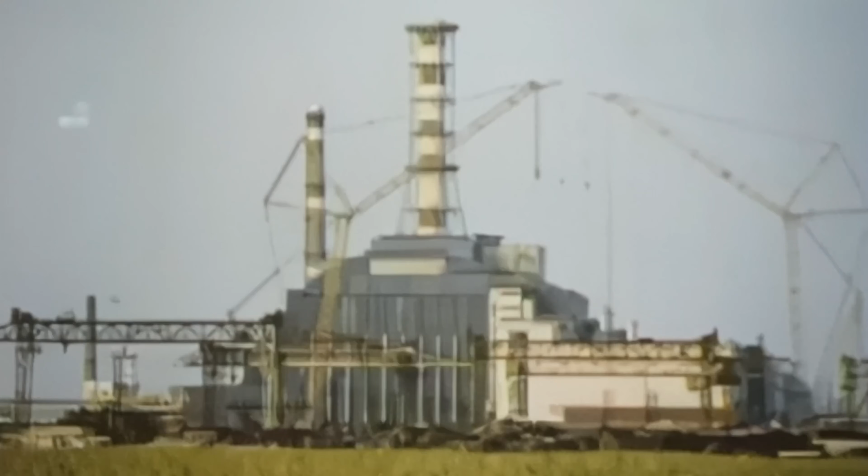Mercifully, we are approaching the end of the long 1990 article 'Investing Chernobyl,' written by Chernobyl liquidation veterans and nuclear power plant workers. Let us remind ourselves why we have spent so much time on this thing, boring and confusing many people who have experienced the misfortune of clicking on one of these videos. Despite being authored by people with direct experience of Chernobyl, the article was written in what is referred to as a peculiar historical period where the information reaching the public was, let us say, curated. And so this particular article was consigned to a local newspaper and limited publicity, the truth of it notwithstanding.

We have decided to give it more attention and publicity, as the points raised in it mirror the much better known International Atomic Energy Agency INSAG-7 report published roughly 2 years later, and in some instances provide supplemental information. This article also benefits from not needing to heed diplomatic considerations, and therefore states highly significant takeaways plainly, rather than trying to equivocate.

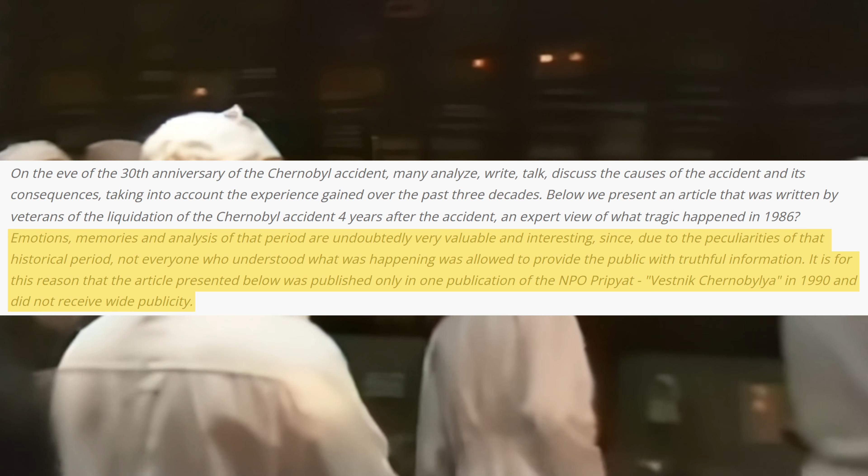We are now on the 5th violation that the article authors put in quotation marks to convey irony and sarcasm. The 6 violations the article focuses on are a direct reference to the table of alleged violations Soviet nuclear power experts submitted to the IAEA 4 years earlier to substantiate why the operators of Reactor 4 were responsible for the Chernobyl disaster.

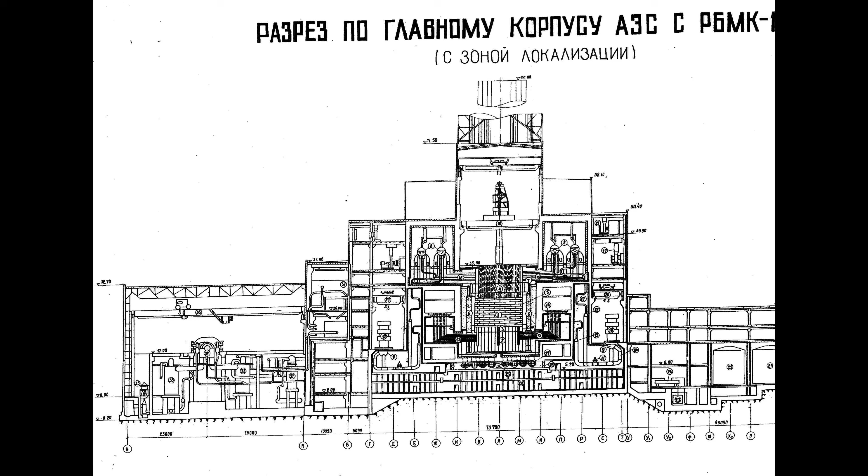The article authors refer to the official wording of 'blocking of protection systems relying on water level and steam pressure in the drum separator.' In the RBMK coolant loop, steam separator drums separated steam subsequently sent to electricity producing turbogenerators from water coming out of the reactor core that was mixed with subcooling feed water and recirculated through the reactor core. Both the water level and the steam pressure were monitored in these drums and had certain limits attached to them.

The article authors highlight the listed consequence of the actions of the operators as being that 'the reactor protection by thermal parameters was completely disabled.' Then the article authors proceed to call what they just quoted complete misinformation. Both parameters under consideration had upper and lower safety limits. In claiming that the reactor protection by thermal parameters was completely disabled, Soviet nuclear power experts implied that all safety limits had been disabled—or, in other words, with 2 parameters having 2 limits each, that 4 protections were disabled.

Without any recourse to information outside of what Soviet experts were claiming, even some workers of RBMK nuclear power plants concluded that the Chernobyl operators were guilty. Yet these safety parameters, unlike the operating reactivity margin or number of control rods in the core, were amply monitored and documented. There were at least 3 monitoring and recording devices for each parameter. There was warning and emergency signaling, both visual and auditory. There were automatic reactor shutdown systems, and finally, there were the operating instructions.

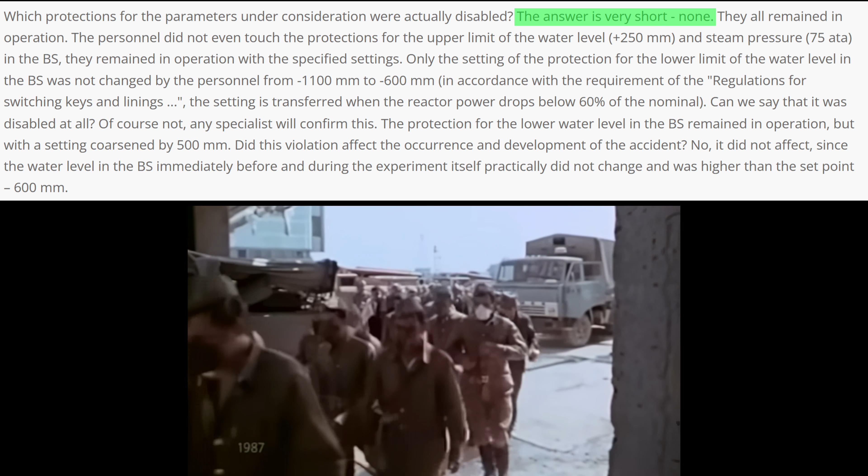So which protections for these parameters were actually disabled? According to the authors, none—they were all in operation. The upper limits for water level and steam pressure in the separator drums were untouched. There is one limit where a degree of complexity is involved, and that was the lower limit for the water level. The operators were supposed to change the set point from minus 1100 millimeters to minus 600 millimeters.

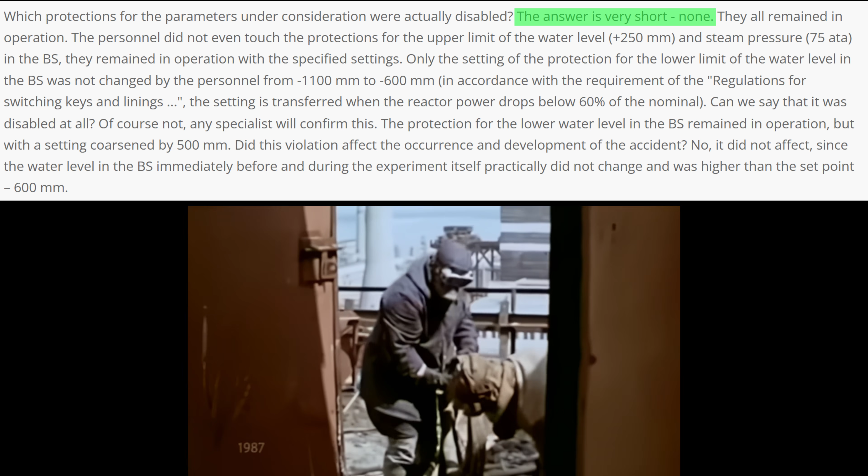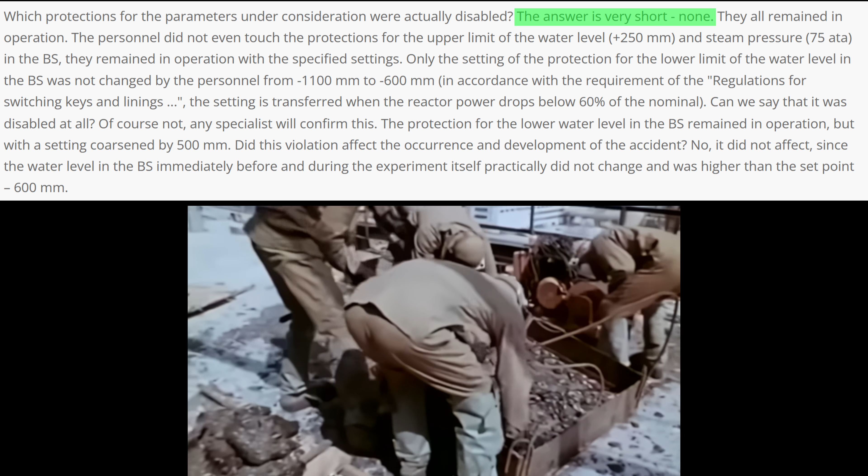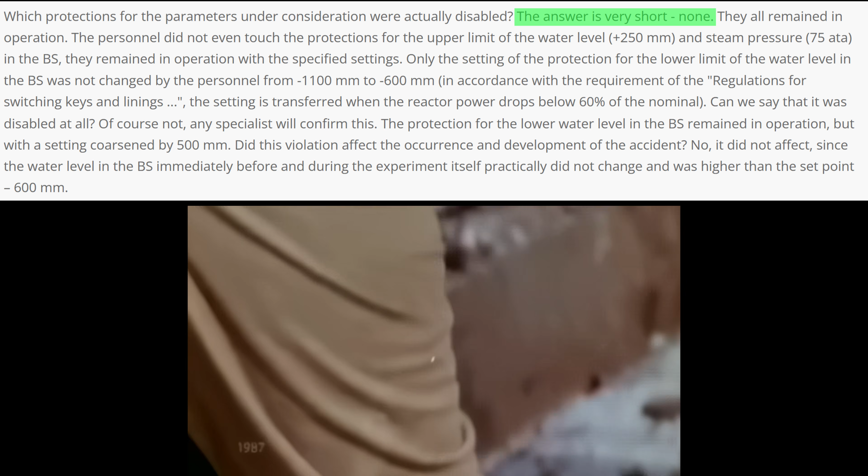Make sure to note that nothing was disabled—rather, it was not enabled. We will turn to this matter when we look at the corresponding text in INSAG-7, because there is a very meaningful distinction between disabling and not enabling here that most people fail to appreciate, if they have ever encountered or attempted to process it. A lower limit protection remained in operation at minus 1100 millimeters. But for now, let's say in quotation marks, the operators committed a violation in not transferring this lower limit to minus 600 millimeters.

Did this violation affect the disaster? The article authors state no, since the parameter immediately before and during the experiment was higher than minus 600 millimeters.

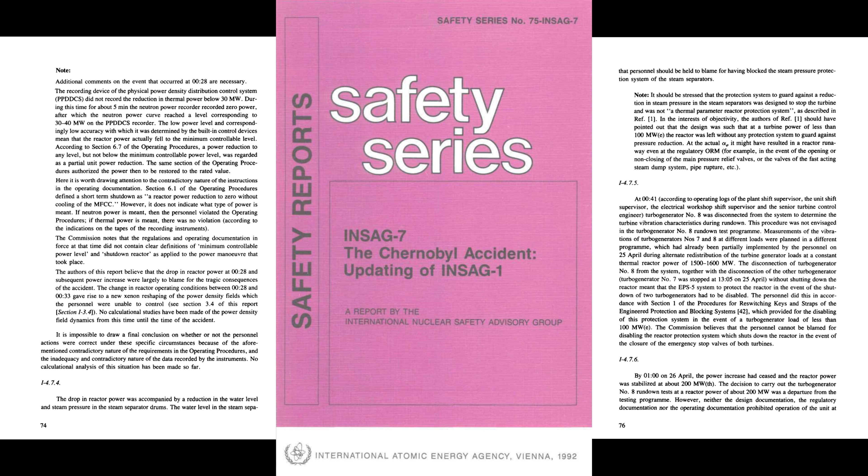Let's turn to section I-4.7.4 of INSAG-7 on pages 74 to 76 to affirm and expand on what we just read from the article. This section tells us that the drop in reactor power was accompanied by a reduction in the water level and steam pressure in the steam separator drums. The water level did fall below the minus 600 millimeter emergency set point without the reactor being shut down. Again, rather than disabling this set point based protection, what the operators did was not enable it.

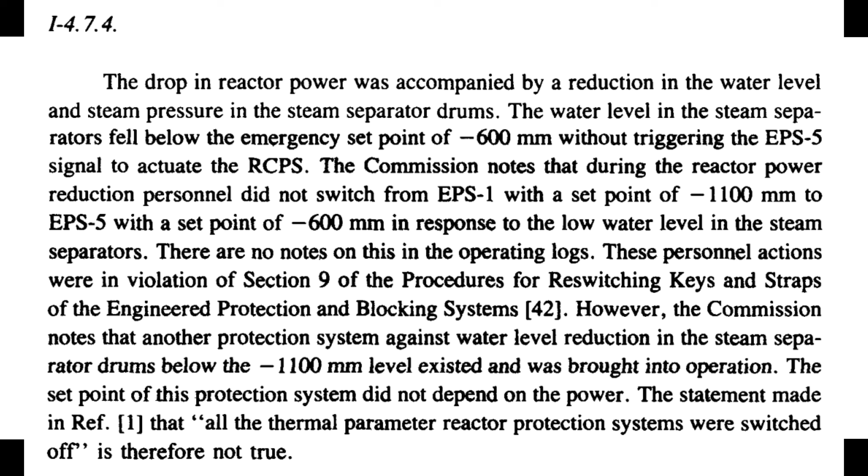This was a violation, which will be clarified shortly. However, protection against water level reduction in the steam separator drums below the minus 1100 millimeter level was in operation.

This voids the statement in INSAG 1 that all thermal parameter reactor protection systems were switched off. Then comes the real kicker. In a note, the designers of the RBMK are quoted. The source is NIKIET, the chief design engineer of the project, who, alongside the scientific manager, the Kurchatov Institute of Atomic Energy, were mostly responsible for the design of the RBMK units. The quote is as follows.

Automatic reswitching of the set points of EPS1 and EPS5 during emergency fluctuations of the water level in the steam separator drums is not permitted, since during operation of any of the emergency protection systems 1, 2, and 3, the water level falls to the minus 600 millimeter set point on the instrument, which has a range of plus 400 to minus 1200 millimeters. This, in turn, will result in actuation of EPS5 and complete shutdown of the reactor.

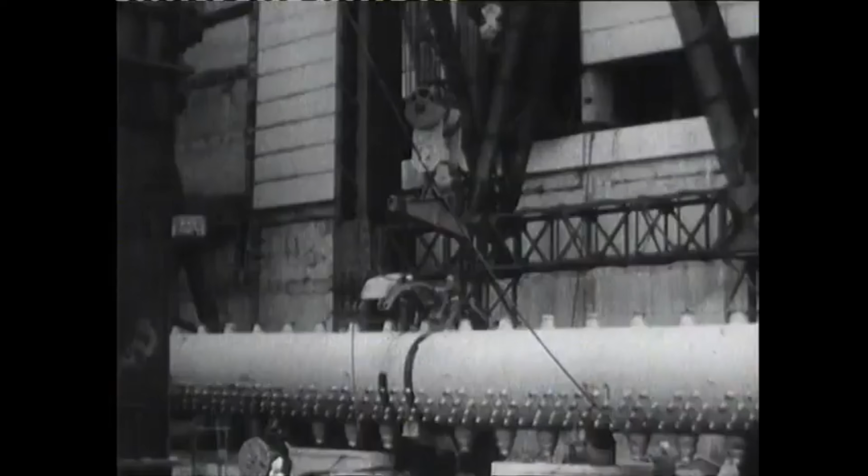This quote shows that the designers of the RBMK did not implement a complete automatic protection system against a low water level in the steam separator drums in the operational circumstances on the night of the Chernobyl disaster, because they explicitly did not want the reactor to be automatically shut down when the water level fell to minus 600 millimeters.

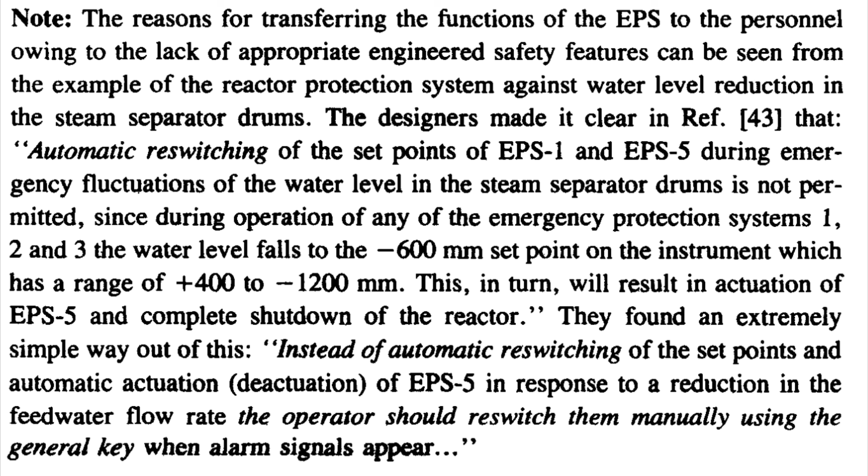The note comments on the extremely simple way out of this. Instead of automatic reswitching of the set points and an automatic shutdown of the reactor, it was left to the operators to manually switch the set points and thus shut down the reactor. This is in the context of the designers explicitly not wanting the reactor to be shut down. Do you see where this is going?

In the following paragraph, it is pointed out an automatic engineering solution was possible, but keeping the reactor running was prioritized. So how was this design decision reflected in operation?

Let's turn to section I-4.6.1 on page 63 and note the title of it: Period of normal operation and preparations for the tests. On page 64, we encounter the following paragraph.

During the period from the beginning of power rise to stabilization of the reactor parameters at 200 megawatts, at about 1:23, normal technical processes and operations were taking place at the unit, except for the switching on of the fourth MCP pair. These included triggering of the fast-acting systems for dumping steam to the condenser, manual control of the water level in the steam separator drums, overcompensation of the reactor, etc.

Among the normal technical processes listed is manual control of the water level in the steam separator drums, the particular emergency set point for which was under manual control rather than automatic protection, because the designers explicitly did not want the reactor to be shut down upon the particular emergency marker being hit. Manually controlling the reactor around this emergency set point was normal practice.

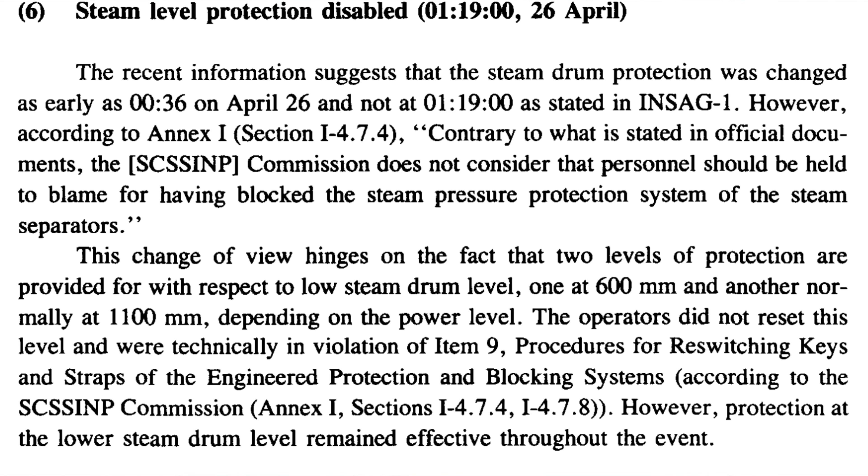There is another wrinkle to this. Page 12 of INSAG 7 identifies another instance of a timing being changed, much as the timing of the disabling of the two-turbine disconnection trip was changed, which we discussed in the preceding video. Soviet experts claimed that the protection systems based on steam pressure and water level in the steam separator drums were disabled at 1:19, in proximity to the runaway and explosions.

This was part of how Soviet experts dramatized their own narrative, constructing their own block of Swiss cheese that the operators ate through on their way to disaster. Call it Soviet Swiss cheese, for its marketing is dramatically different from its quality.

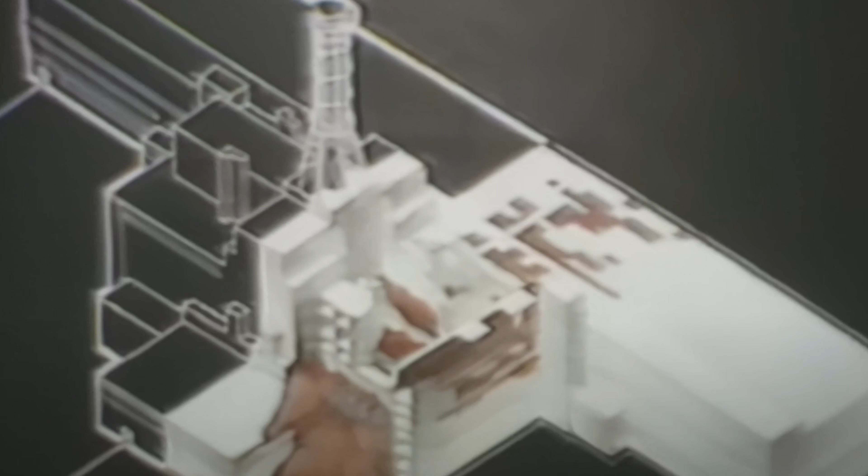As with the two-turbine disconnection trip, Soviet experts changed timings they were well aware of for reasons they were well aware of, to make it seem like operators were given multiple chances in close proximity to the disaster to take an off-ramp, no matter how many violations they had already committed.

Let's look at the timeline on page 54 of INSAG 7. You can see the set point change of the steam pressure being at 0036 rather than at 1:19, which is what the text we were just looking at was focusing on. But at the moment we're focusing on the water level.

On this timeline you can see 6 emergency water fluctuations. We know that the operators were manually controlling the water level rather than resorting to shutting the reactor down, because the designers did not want the reactor to be shut down. But there is even more to this.

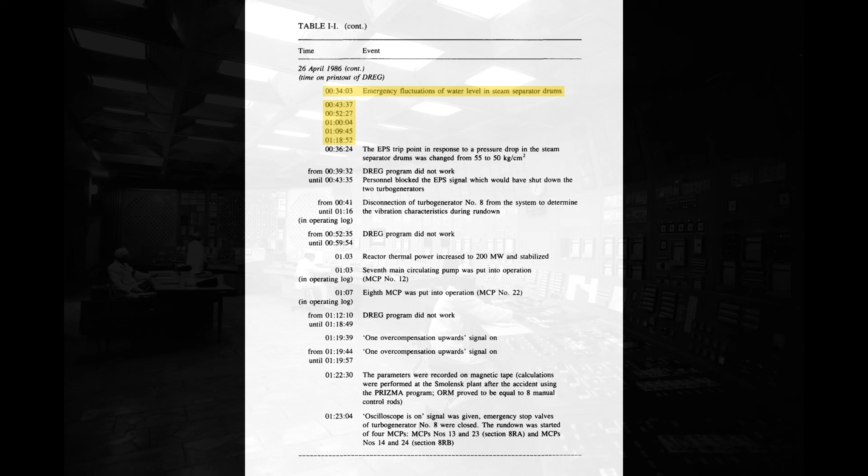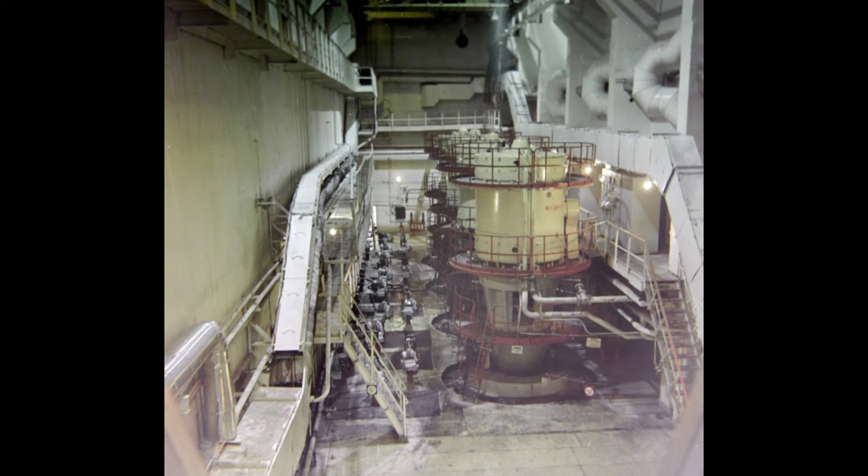Note how 4 of the 6 emergency fluctuations occur at 1 AM and before, or before the 2 additional main circulation pumps were connected to the reactor at 1:03 and 1:07. Why is this notable? Check out what else Soviet nuclear power experts, led by Valery Legasov, were feeding their international counterparts in 1986.

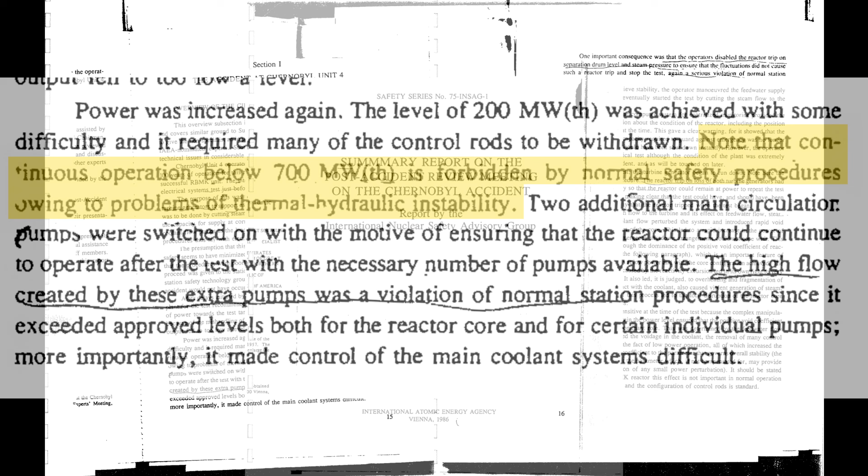First, we turn to pages 15 to 16 of INSAG 1, the 1986 IAEA report on the Chernobyl disaster, written under the heavy influence of Soviet experts. After the lie that operation under 700 megawatts was forbidden, we encounter the false violation allegation of a total reactor flow value being exceeded. We have already covered both of these topics in previous videos.

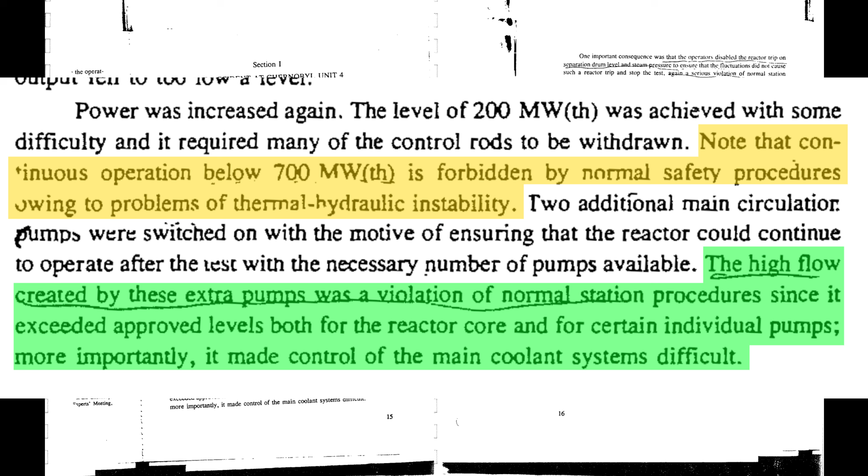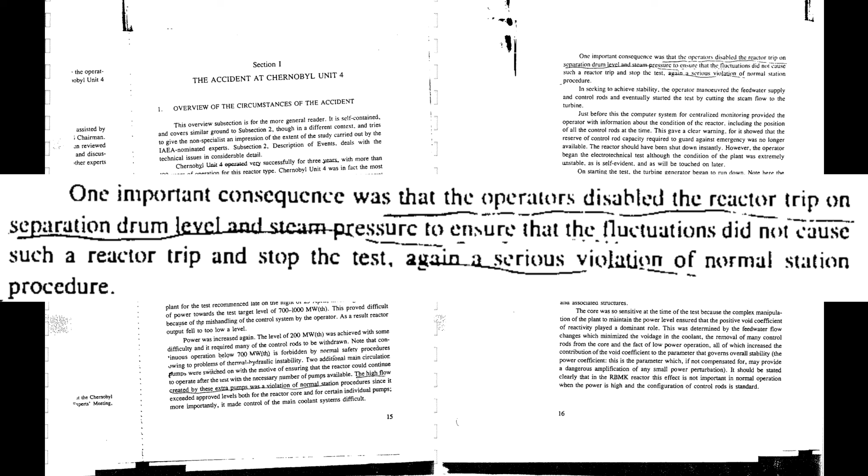This report claims that as a consequence of the connection of the additional main circulation pumps and a high total flow rate, the operators disabled reactor trips on water level and steam pressure in the steam separator drums. We'll get to the steam pressure next, but here we clearly see the false timing of the disabling of these protection systems, which were never disabled, being linked to the connection of the 2 additional main circulation pumps.

Now, why does this matter?

Here we get insight into the narrative machinations of Soviet experts. They had a tall task - they couldn't just lie about one thing, they had to lie about many things. They needed an entire chain of made-up violations to show how the Chernobyl operators went through a series of roadblocks Soviet experts put in their path, thus defending themselves and making the operators accountable.

Remember from the previous video how Valery Legasov swore to secrecy, stating that success in Vienna was predicated on blaming the operators so that the Soviet nuclear power industry could continue operating independently, and reparations wouldn't need to be paid. The Soviet Swiss cheese model of disaster is how the operators were successfully scapegoated. Don't buy it - it's not good for you, and makes you look like an idiot.

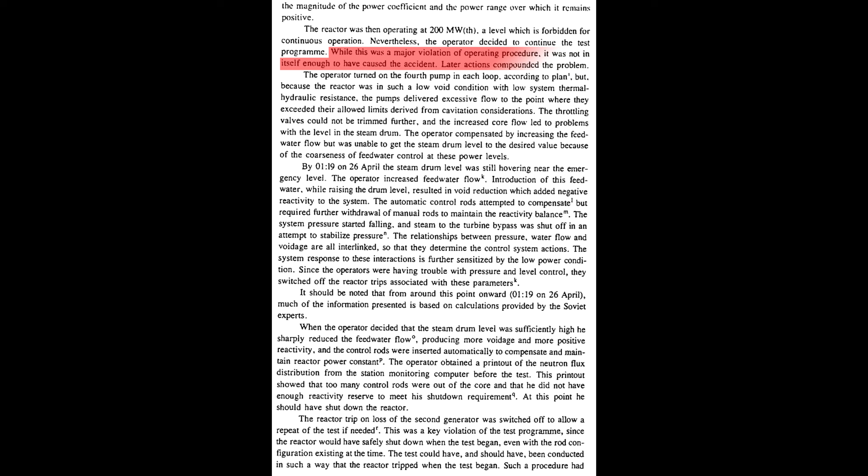On page 24, we see the explicit stringing together of these false allegations. After the lie that 200 megawatts was a power level forbidden for continuous operation, the following is written: while this was a major violation of operating procedure, it was not in itself enough to have caused the accident. Later actions compounded the problem. For their purpose, Soviet experts needed to clear a high bar of violated redundancies, and they made this clear.

The following two paragraphs link the steam separator parameters and the purported disabling of protection systems based on them to the connection of the two additional main circulation pumps, thereby linking violation to violation to violation, digging a deep hole to bury the operators in.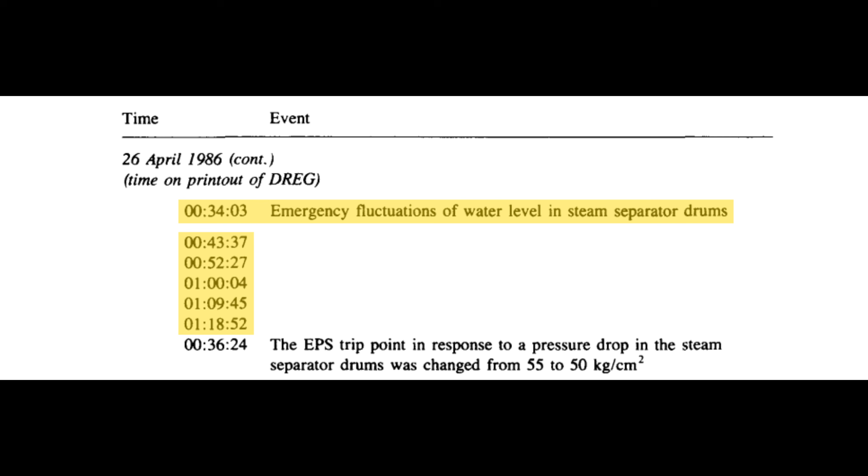Yet this was nonsense. Rather than at 1:19, some 4 to 5 minutes before the explosions, the steam pressure set point was changed at 36 minutes past midnight. 4 of the 6 emergency water level fluctuations occurred prior to the connection of the 2 additional main circulation pumps, and they were controlled manually as part of normal practice, because the RBMK designers explicitly did not want an automated system that would shut the reactor down upon a water level emergency fluctuation.

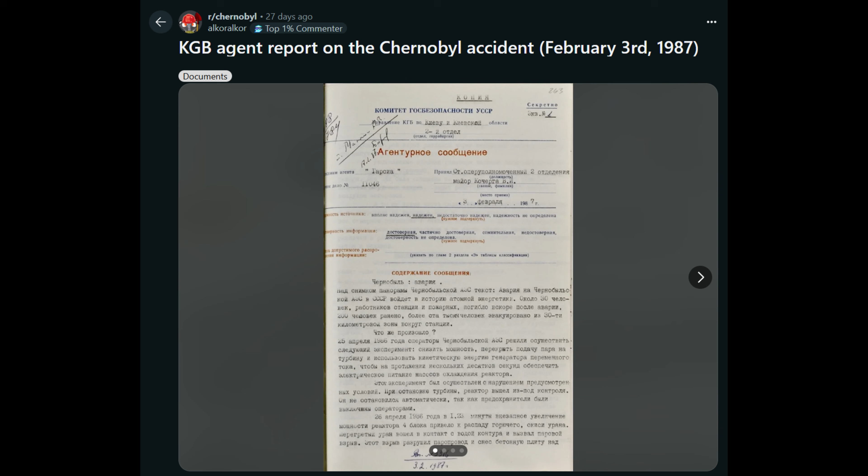That is the level at which the masters of weaponized narration operate, and the level at which YouTube content creators, book authors, professors, entertainers, documentary writers, journalists, Wikipedia editors, etc., whatever, do not. A recent Reddit post reinforces our interpretation.

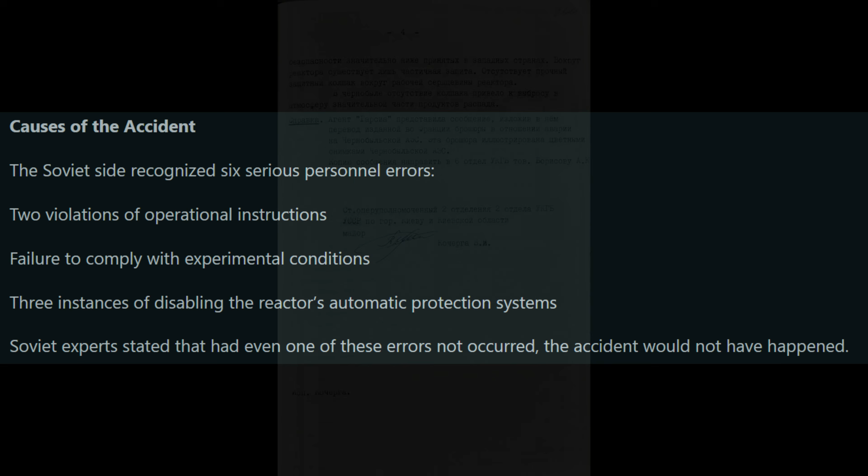The post features a KGB document from 1987 that was a translation of a French brochure or booklet on the Chernobyl disaster. A single line is of particular interest to us in this context. After the 6 violation allegations against the operators are mentioned, the following is written: Soviet experts stated that had even one of these errors not occurred, the accident would not have happened.

We don't know if this was another particularly revealing Soviet expert oral statement that wasn't put on paper, or if Soviet experts wrote it down somewhere, but they were explicitly making the argument we're describing of linking violation allegations and emphasizing the importance of each, thus establishing a false notion of redundant protection, a Soviet Swiss cheese model of disaster. They went to the length of manipulating timings to streamline their deceitful narrative and indeed dramatize it.

People usually think of the HBO miniseries being a deliberate dramatization for effect, despite its creator stating multiple times his intention was to the contrary, whereas they have no idea how far Soviet experts themselves went to dramatize Chernobyl where it suited them.

Legasov's dramatic performance at Vienna, it turns out, was not incidental - it was integral to placing the blame on the operators. When Adam Higginbotham summarises Legasov's performance on page 276 of Midnight in Chernobyl, do note the additional irony of Higginbotham himself not realising just how masterful it was. Legasov had successfully misled multiple generations, and counting.

What the operators did at 36 minutes past midnight was change the set point from the higher value to the lower value, with one of the turbines already having been switched off. In other words, this was about as unremarkable of an action as it gets. What does INSAG 7 write on this matter? Well, it really is that straightforward.

At 36 minutes and 24 seconds, the personnel changed the set point for switching off the turbine of the protection system, which guards against reduction in steam pressure in the steam separator drums, from 55 kg force per centimeter squared to 50 kg force per centimeter squared.

These personnel actions were in accordance with requirements of the operating documentation, since according to section 12 of the procedures for reswitching keys and straps of the engineered protection and blocking systems, personnel were entitled to select this set point.

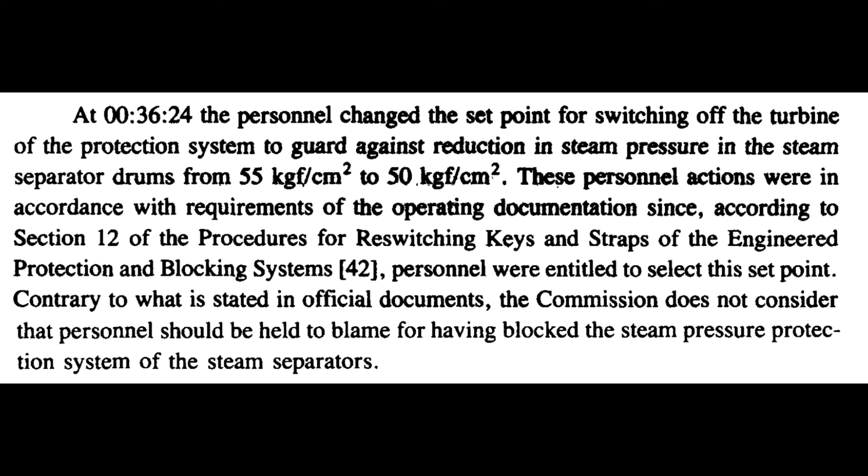Contrary to what is stated in official documents, the Commission does not consider that personnel should be held to blame for having blocked the steam pressure protection system of the steam separators.

The fact that Soviet experts attempted to twist something so blatantly uncontroversial is a testament to just how far the lies of Chernobyl went, and with good reason. Again, Soviet experts needed an entire series of unforgivable violations to paint the operators sufficiently guilty so as to weasel themselves and the Soviet nuclear power industry out of the immediate existential threat they were facing.

Refer to the previous video for how both Valery Legasov and Soviet leader Gorbachev were cognizant of this problem. As usual, the truth gets even worse for Soviet experts.

The note on page 76 of INSAG 7 points out that the protection system associated with low steam pressure in the steam separator drums was only designed to stop the turbine, and was not, as Soviet experts claimed, a thermal parameter reactor protection system. The reactor itself would not be shut down.

So it appears that when bringing up a turbine power of less than 100 megawatts electric, the authors of this paragraph are referring to when both turbines would be switched off or separated from steam supply, per operating instructions. In these circumstances, there would be no protection system whatsoever against a pressure reduction.

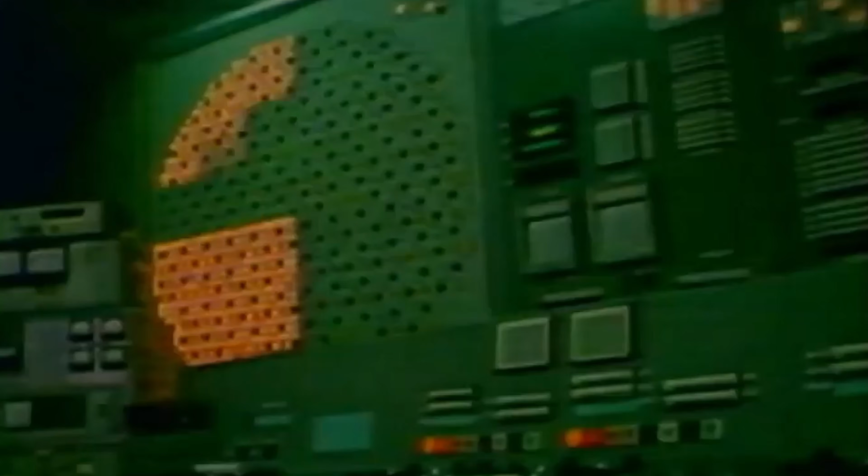RBMK reactors had a self-regulating rather than self-amplifying quality, like other nuclear power reactors worldwide. While meltdowns are a risk, runaway reaction explosions were not, as far as we are aware. The runaway property that made Chernobyl possible was not there any longer.

The article authors summarise what we've covered in this video as follows. In reality, none of the protections based on the steam pressure and water level in the steam separator drums were disabled. The single nominal violation was the operators not changing the lower limit water level set point.

The operators having to change this set point manually came from a desire of the RBMK designers to not have the reactor shut down automatically upon the particular value being hit. Therefore, the operators controlling the water level and correcting emergency fluctuations was normal operating practice, rooted in the priorities of the RBMK designers. Furthermore, these parameters were normal at the time of the final rundown test.

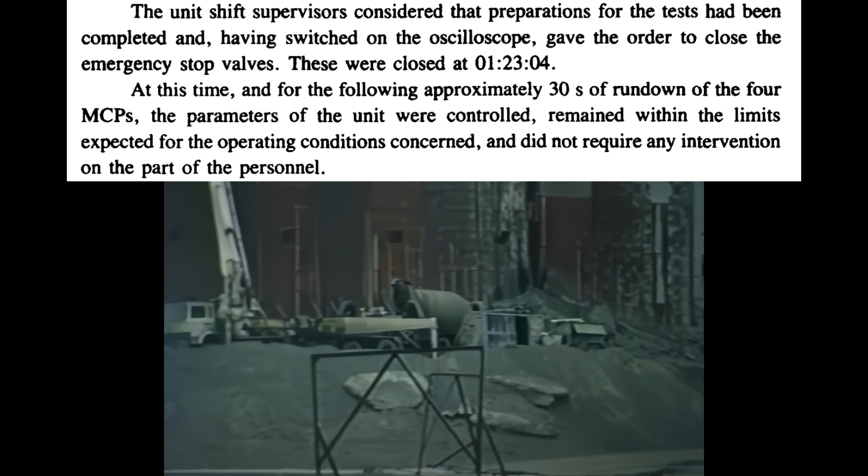Page 65 of INSAG 7: The unit shift supervisors considered that preparations for the test had been completed, and having switched on the oscilloscope, gave the order to close the emergency stop valves. These were closed at 1:23:04.

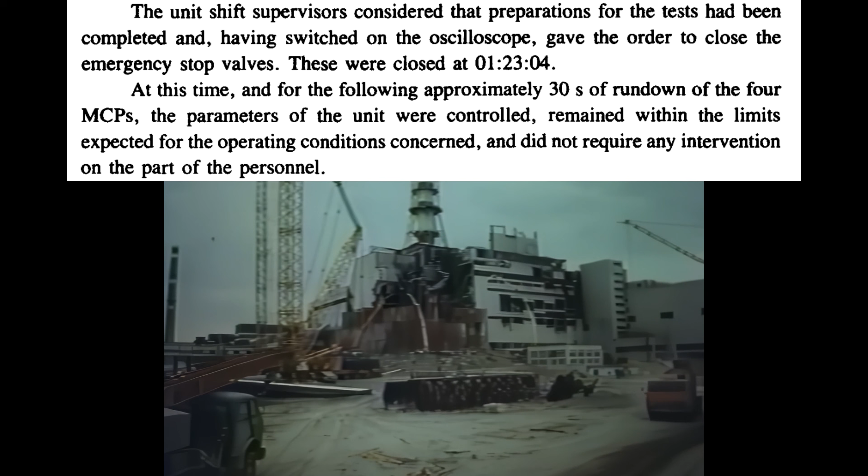At this time, and for the following approximately 30 seconds of rundown of the 4 main circulation pumps, the parameters of the unit controlled remained within the limits expected for the operating conditions concerned, and did not require any intervention on the part of the personnel.

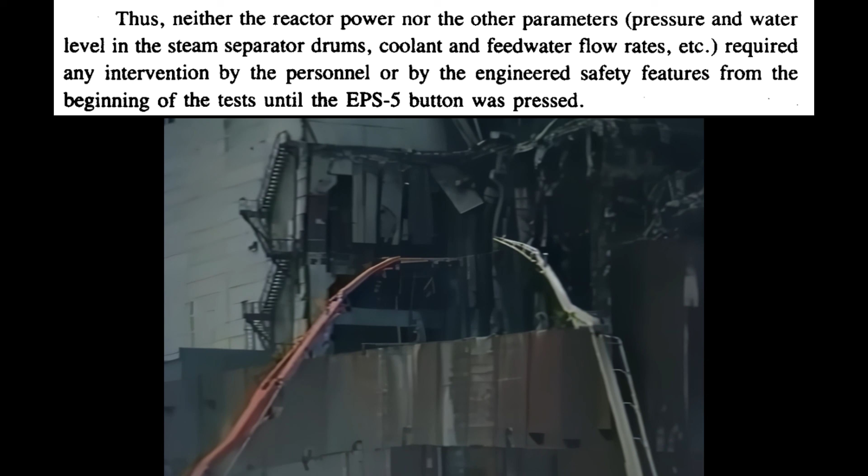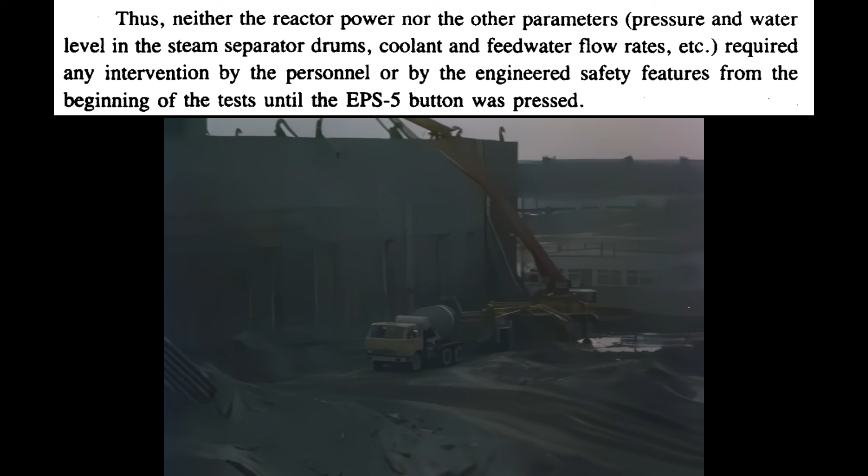Page 66 of INSAG 7: Thus, neither the reactor power nor the other parameters - pressure and water level in the steam separator drums, coolant and feed water flow rates, etc. - required any intervention by the personnel or by the engineered safety features, from the beginning of the tests until the EPS5 button was pressed.